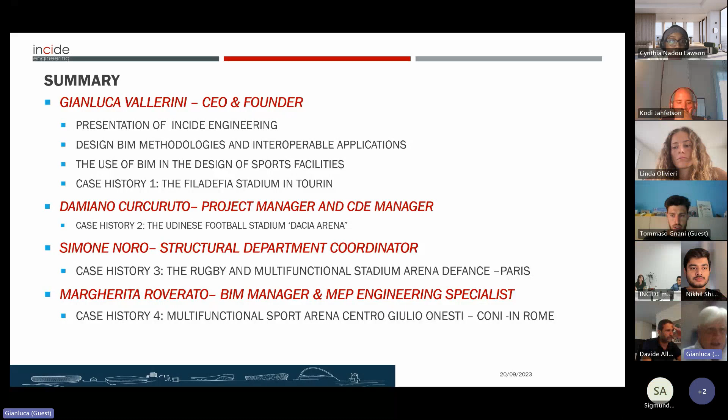So this is the summary of the presentation of today. As already told you, these are the people that you meet, and talking a little bit about me and about my company, just to let you know who Incide is and the experience that we have. Incide, or Inside, depending on the language, means industrial and civil design. This is the history. The company started 25 years ago, so we can say that we are a well-skilled, well-established design firm in Italy, but our company is not only in Italy.

Our experience goes through different countries in the world, and also we have some family companies in three countries. One company is in Switzerland, in Lugano. One company we have in Paris, another company we have in Morocco, in the capital, Rabat. Incide is a multifunctional, multidisciplinary engineering firm. So inside our company, there is all the experience that permits us to develop the design. So going from architecture to structural design to MEP, we can develop a project totally inside.

Also, it happens sometimes that we collaborate with other firms, architectural firms, structural firms, it depends on the size of the project. Sometimes we develop the project totally internally, sometimes we collaborate with other companies, especially when we are talking about a big project. And as I told you before, we have a good relationship also with American firms. We are working with a couple of Chicago design firms, but not only. And our experience goes from the Middle East to Europe to Africa.

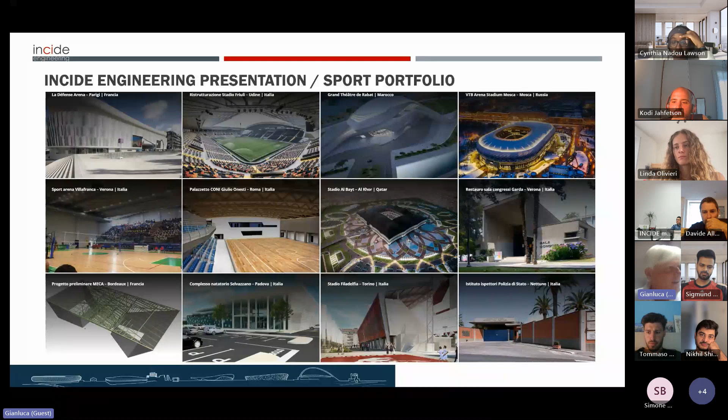You can answer. Please interrupt. I can't answer. Sorry? Do you understand the question? Yeah. Yes, I do understand. So

Is there anyone who would like to tell me if they know what BIM means and what BIM technology is used for in design, just to understand if what I'm illustrating to you is something you know or not? I've heard about BIM, just basic, but not in depth. Okay. So, good.

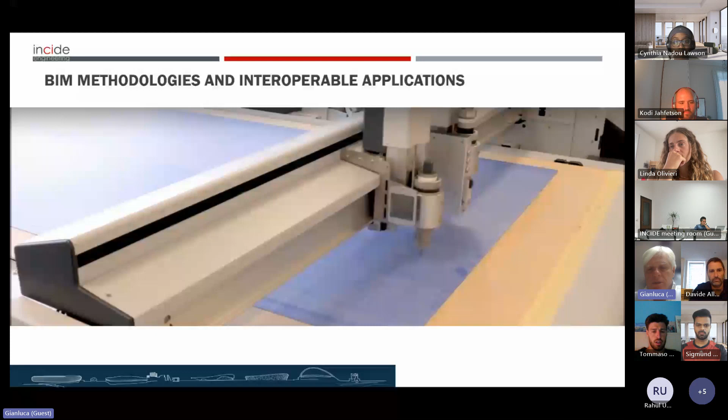Now, going to the future and looking at what the design office is now. Now the design office is completely different from the picture that we saw before. Now we are looking to the new technologies. All the new technologies are entering our way of working, and in our office we are also looking at what the future could be. Now all the world is talking about artificial intelligence, and for sure it will be necessary to have the competence to use these technologies. Otherwise we'll be out of the path of the future, and this has to be done step by step.

BIM, what does it mean? Wikipedia states that BIM, building information modeling, is a process involving the generation and management of digital representations of physical and functional characteristics of places. Building information models are files, often but not always in proprietary formats and containing proprietary data, which can be exchanged or networked to support decision making about the place.

What does it mean? Now we are no longer using paper to develop our projects. We are creating digital twins. Digital twins, what does it mean? They are 3D representations of reality, but this 3D representation is not only a geometrical appearance; mainly it is data included in our model, and from this data we can obtain many things, not only drawings, but as we will see later, we can use this model in different ways and different parts of our process.

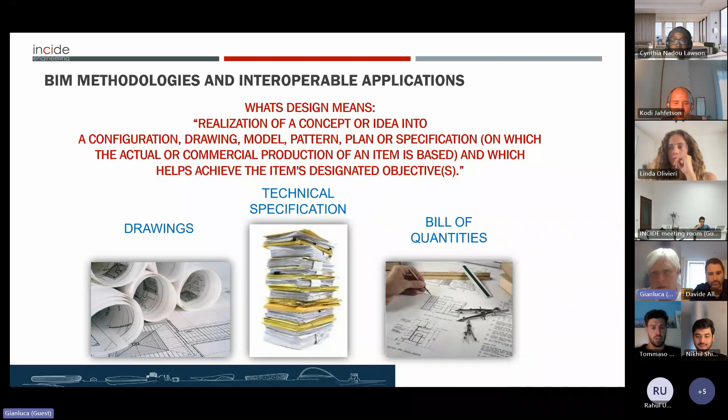This tower was built at the beginning of the century and is a very complex project. Anyway, it was built very quickly and the design is very complicated, without any new technology. So what does this say? That in any case, what is very important is also the engineering experience and the human capability. And now we have a lot of tools that permit us to facilitate our design, to construct our project very quickly and in a very safe way.

But in any case, human capability, human knowledge, is something that I think remains the most important thing for the future. Artificial intelligence is coming, but I would like, and I hope, that it will not replace our intelligence.

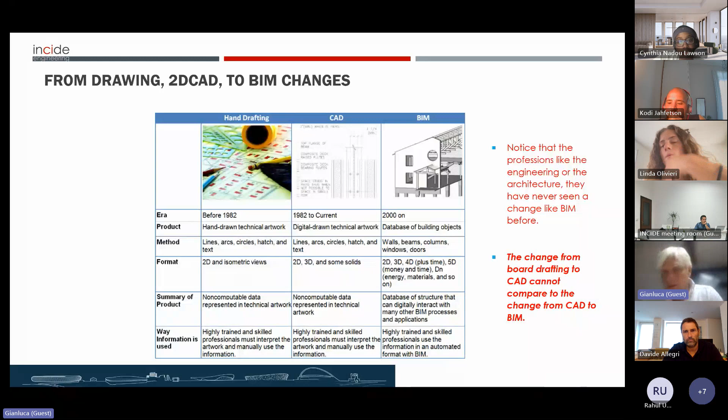And what is very important is that these objects are not only geometrical objects, but inside these objects a lot of information can be added. The software and tools we are using permit us to introduce into the object physical properties, material properties, all the information needed for other analyses. The model can be exchanged from an architectural model to a structural model, from an architectural model to energy analysis. So this is a way to put inside the object all the information that can be used, also in terms of cost of materials.

So the BIM model can now be used for all aspects of the design. All the design phases can be developed using BIM models: from 2D drawings, as I told you, to different types of analysis, and also bills of quantities, meaning how many kilos of steel or how many cubic meters of material. But in the end, all this information can also be used for the future, for building management, producing fabrication details, and the model can also be used for project management. So different parts of the design and of the construction process can be managed using our model, and this is what we are looking for in the future.

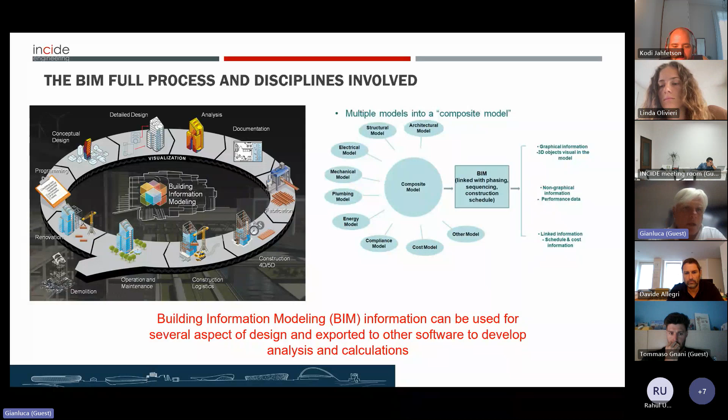At Incide, we have been using BIM for more than 15 years, and all our designs have been developed using this technology. The limitation we have now is that after the design, on the construction site, there are still few companies using this model to manage the construction process. So this is the future, and for sure we will arrive at such a situation, where the whole construction process can be managed using BIM: design, construction, and also building management.

In BIM, several dimensions are used. 1D and 2D are the traditional CAD dimensions. BIM technology uses four other dimensions. 3D is the 3D representation. 4D is the dimension of time, so we can introduce elements that help us produce the time schedule of the construction. 5D is the dimension of cost. 6D is the dimension of performance. So with all these four dimensions, we can manage the whole process and add all the information of the design process.

What are the other big advantages of using this type of tool? Perfect coordination of drawings, perfect coordination of design. All aspects of the design are included in the model. So from the very beginning of the design phases, we can check and manage the coordination between architectural, structural, and MEP. This is completely different from the past, when each discipline worked separately.

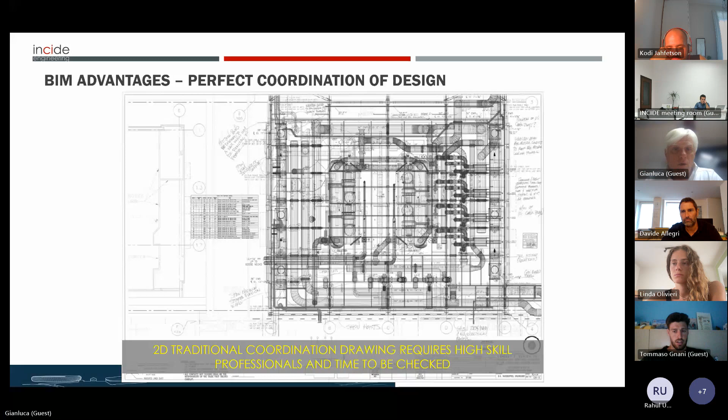Now, using BIM, different people and different disciplines can share the model using the cloud. That is a normal tool that we are using now. We can also work in different places around the world, coordinate and work together, having this type of coordination in the early moment of the design. And this is a very nice help for our job. So at the end of the project, the design will be perfectly coordinated.

Okay, it's well coordinated. In any case, human error never disappears. But we can anticipate a lot of the problems that normally arrive during the construction phase. And during the construction phase, an error coming from the design costs much more than solving the coordination problem during the design phase. So it is a very big help.

So the benefits of using this type of process are saving time, finding mistakes, and managing interference during the design phase, so not having big problems during construction, and also reducing cost, so cost optimization. With our experience using these tools, we can say that we have effectively had these benefits during these 10 years of using this process. But as I told you before, for me it's very important that human ideas and human experience remain a central part of our activities.

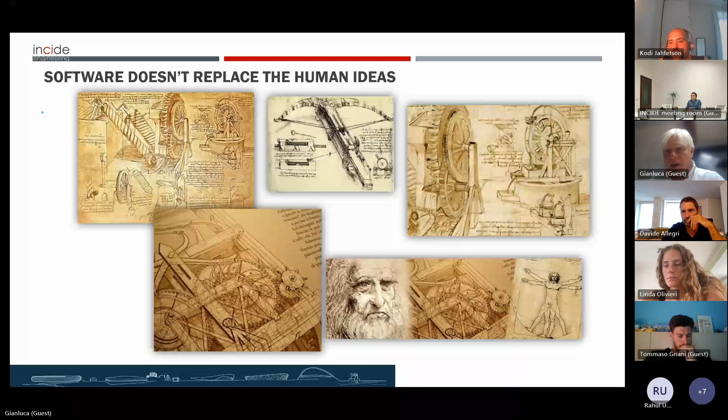Another important part of the development of our technology now is the possibility to exchange the data coming from a 3D model, from BIM, with different software for different parts of the project. This is called interoperability, and it allows us to use different software for different types of analysis. Here is a little video.

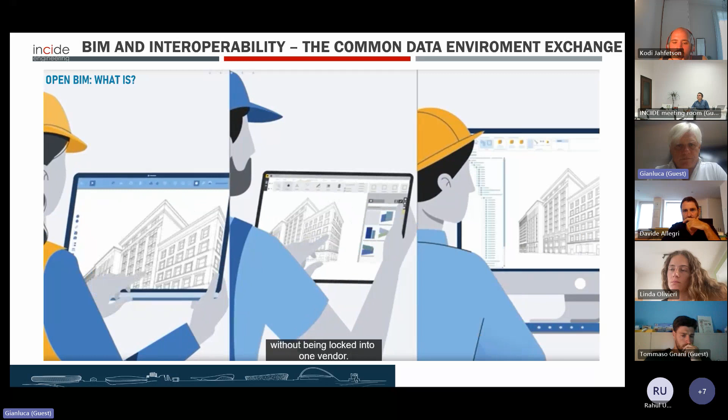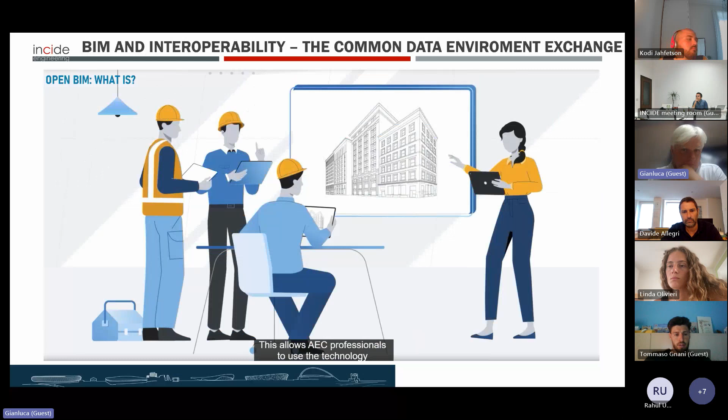What do we mean when we talk about Open BIM? Well, Open BIM is a format of building information modeling that uses open standards, providing several key benefits. First, every project member is able to use the best tools for their particular workflow without being locked into one vendor. Second, any stakeholder can access the BIM model without interfering with the native design. Third, all the disparate systems being used on a BIM project can communicate with each other. At the heart of Open BIM is a standardized communication protocol based on Industry Foundation Classes, or IFC. With this open framework, data travels easily between technologies. This allows AEC professionals to use the technology of their choice without the limitations of proprietary data. This leads to benefits that improve cost control, productivity, as well as reducing waste as the project has more efficient handoffs and fewer communication errors or data gaps.

For more construction content you might dig, subscribe to Constructible.

Okay, this video is a summary of what I said before. Now it is possible to exchange the BIM model using a common format called IFC. We can export an IFC model from one software, and this IFC model contains all the information we introduced in our model. For example, in our design we normally use the architectural model as a big box in which we introduce information not only for the architectural design, but also cost information and material properties.

So by exchanging this IFC model, we can use it with other software for structural design, for example, or energy analysis. This is a process that every company is creating according to their technology, and by making this process more stable it's possible to connect this information more easily and have a very quick design flow. So this is also something we are working on.

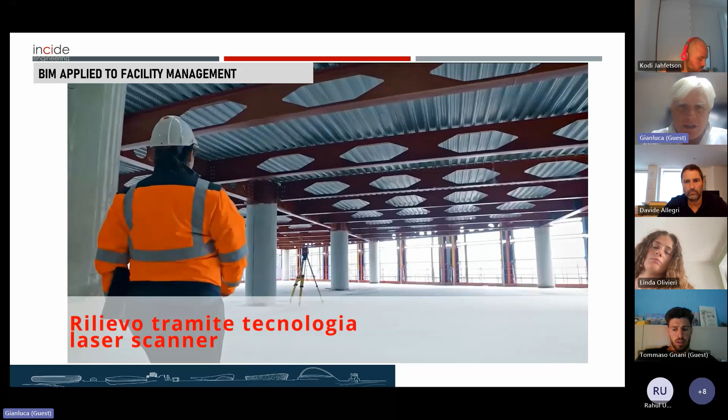Next one. And the future of using this type of software and tools is to use them for the entire design process. This is not a sports facility; it's a tower designed by our office in Milan. This experience started from an existing building, for which we developed the survey.

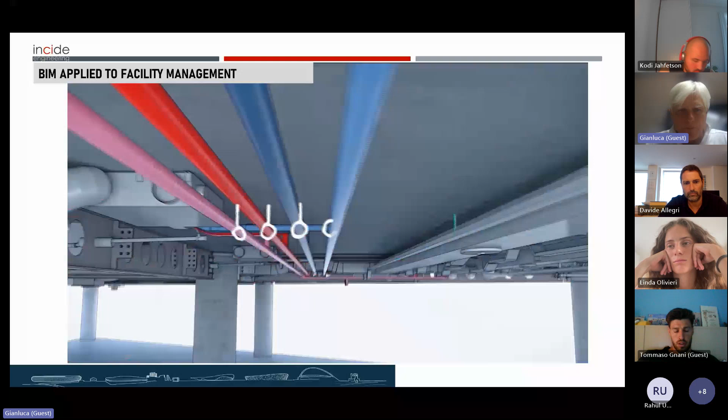The survey has not been developed using manual tools, but using a laser scanner. After the laser scanner, we transformed the laser scanner result into a BIM model. And after, we started the design, so inside the model all the elements of the design have been introduced, MEP especially, that has a big impact on the design. So all these elements have been introduced properly and without creating any problem during the construction.

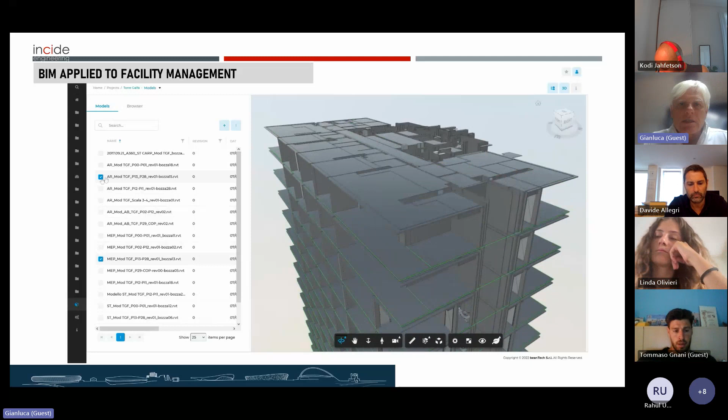Also during the construction works, the model is being used in order to check the design, to check the interference. But now we are using this model as a digital twin for facility management. So the model represents the reality. This model has been given to the owner of the building, and inside the objects there is information related to the management.

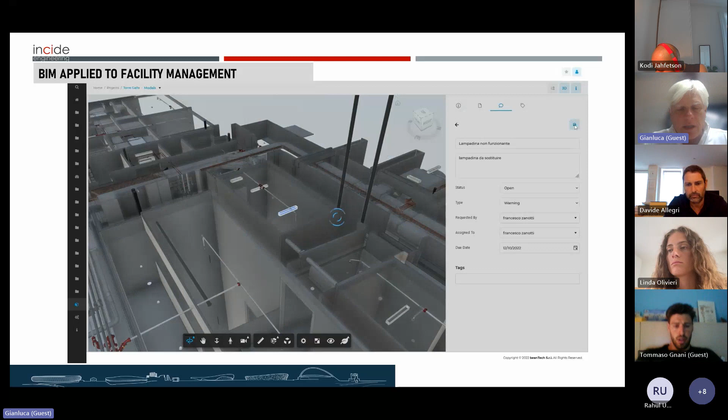So there is information about the data sheet of the material. So during the management, the person can have information about the material that is already installed, can have information about the time in which they have to check this element. And using this tool, this type of activity became easier, more friendly, and using also, what's the name? Business intelligence tools.

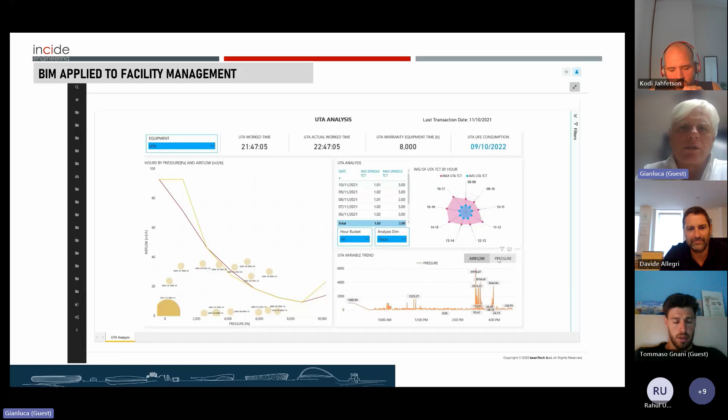We can have a report of all these maintenance activities, and also using sensors on the equipment, we can have information about the consumption that the machines have in the building. So also the energy consumption of the building can be checked and properly maintained, with monitoring during the life of the building. So this is one of the most important results of the technology that can be applied to the use of BIM.

So starting from the design, this model can be used for the whole process, arriving at facility management. And this is not only a vision, now it is something that is already a reality, and we are using these tools in our process.

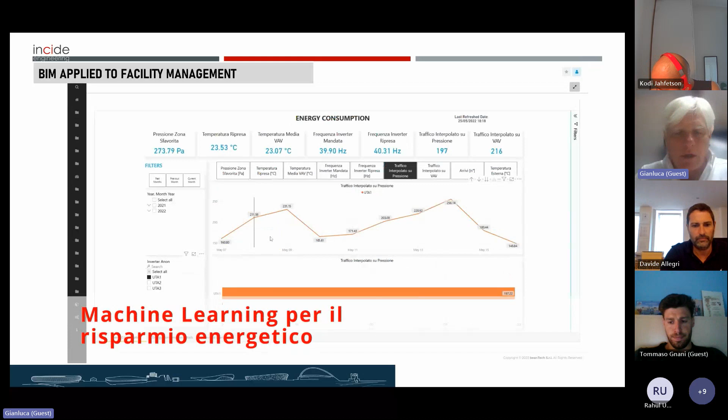Now I would like to tell you about the first case history. This is an experience that we have of a soccer facility in Torino, in Italy. This was a project of the renovation of a historical stadium. This was the initial stadium of the Torino soccer team. During its history, the stadium was abandoned.

There was a tender from the Turin soccer team in order to rebuild the stadium with the idea to recover the initial view of the stadium. So this was the main goal of the project. As I told you, this project was also developed using BIM technology. So a full model has been developed, including all the aspects from architectural to structural to MEP.

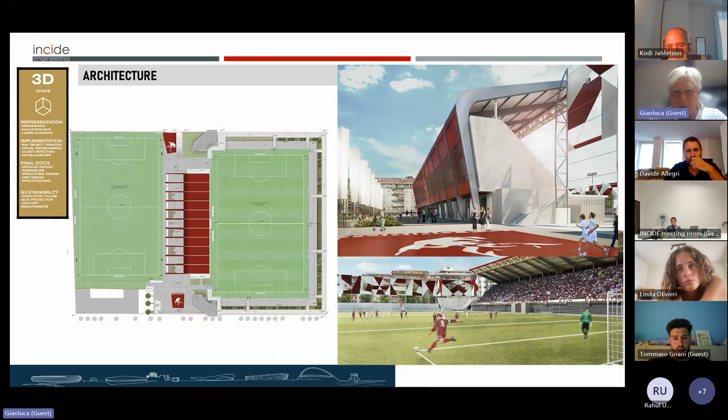And from this BIM model, all the analyses have been developed. So energy analysis, structural design of the steel structure and the concrete structure, and also MEP calculation, electrical design. This is the architectural. Architectural normally means plans, but also 3D representation and renderings. We had very good views, and that was appreciated by the client,

and also perspectives and elevated views of the project, but at the same time sections and views. So all these representations came directly from the BIM model. We developed the model, and from the model we can have all these representations. And also we can have representations of details.

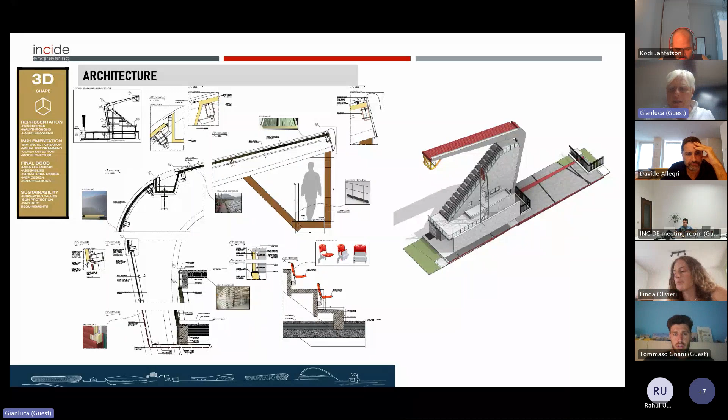The details are very important because our design normally goes to final design, meaning that we are giving the client proper information on how the construction has to be built. So it is not only general information, but detailed information. You can see that detailed representation of the construction is also included in the project. And details means not only geometrical representation, but also information on the materials.

From the BIM model, using databases and standards, we can have information on all the elements that are included. And from this information that is part of our design, we can also have information about the quantities. So everything is included in the model.

In the past, we developed 2D drawings, and the information about materials, the quantities and their properties was part of another section of the design. Now, using this type of approach to the design, everything is included and everything is well coordinated. But at the same time,

Sorry, Gianluca, just a curiosity for me.

I think you should make a specific library for the stadium, for a sport architecture. Is your own library built specifically from your office, or is it a library that you can buy somewhere?

This is a very interesting question, because we were discussing this issue a few days ago with colleagues. What is strange, especially in Italy, not in the rest of the world, is that any design office is developing by themselves their own library and organization of their project.

At the end, the result of our design - there is a video showing this. This is the BIM model, the complete model developed for the project, which contains all the information that allows us to present the project.

We are not yet at the phase where we can deliver just the model to the project. Probably this will be the future of our job. Now we are delivering drawings, technical specifications, bill of quantities, and at the same time, for certain big projects, we are also delivering the BIM model to the client.

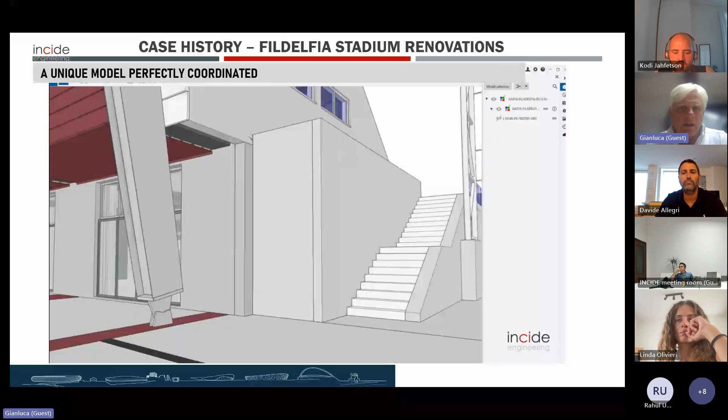The client is not yet fully aware of what he has to do with this model, but this is the rule we have in Italy now - for projects over 10 million euros, we are obliged to submit the BIM model to the client as well. So this model has been developed and perfectly coordinated. Everything is included.

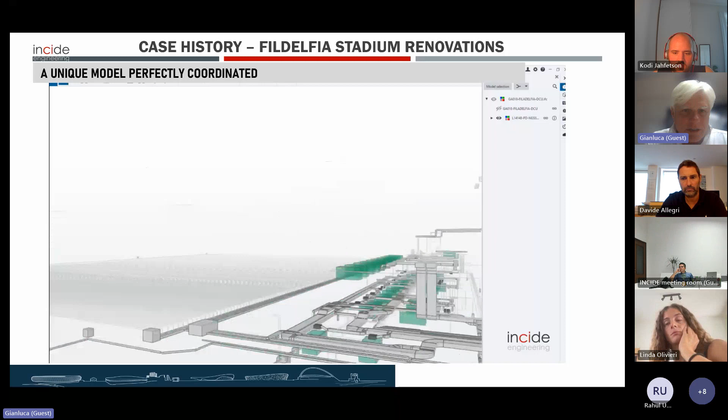You can see also there is for this soccer field the heating of the field, in order to avoid ice during the winter season. It's a little facility because there is not big tubing, since this facility is used only for training, for the main team and for the junior teams to play.

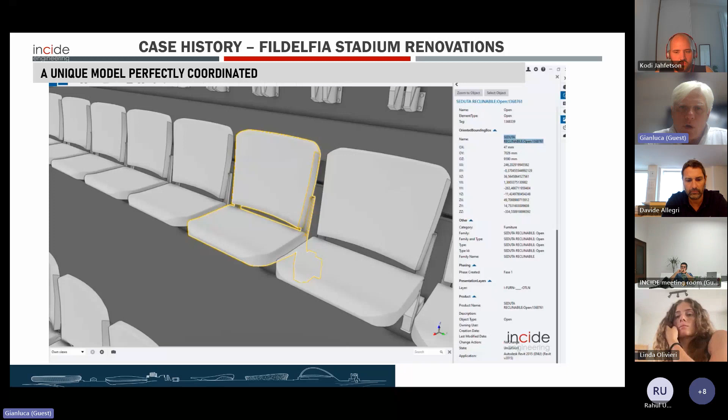So the tribune is not a big tribune. If I remember well, it's about 2,000 seats, the total capacity of the tribune. But you can see that you can have information. This is the IFC model, not the original format. So also in the IFC model, this is a viewer you can have from different software houses. You can have information about any object included in the models, not only in the proper software tools, but also in the IFC visualization.

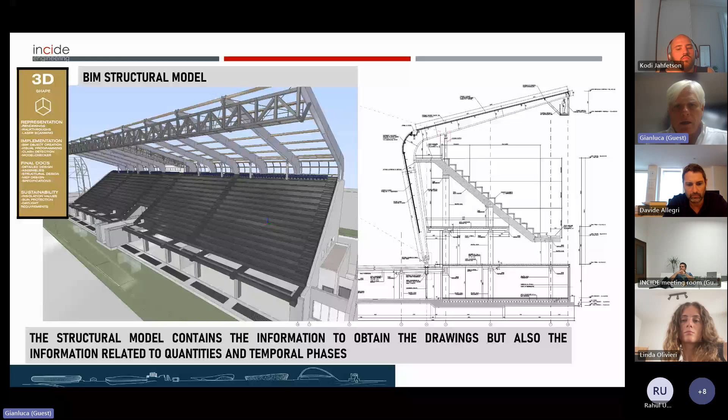And what else? Okay, we can go ahead. So we have a structural design, we developed also the structural design. This was a concrete tribune with steel roofing. So we developed some models and also drawings at the end in order to build the structures.

So, having the possibility to introduce this element in the model from the very beginning, the very initial stage of the project, reduces a lot of problems in a further stage of the project, because most of the time the space for the mechanical electrical system is not taken properly into account in the design. So we are well coordinating the design using this type of tools.

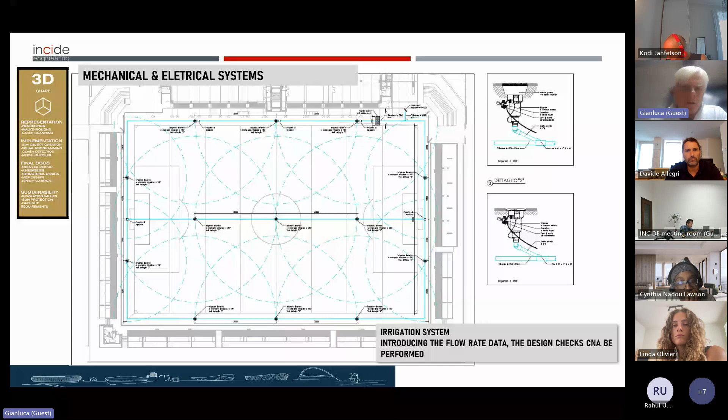Talking about software, we are using Rhino together with Grasshopper, and using these tools we can change input data. We can change the radius of the circle, we can change the spacing of the grid, and all these changes are managed very easily using this type of tools. This is the future of design, especially because now architectural shapes are very complex, and it's not possible to manage them in any other way.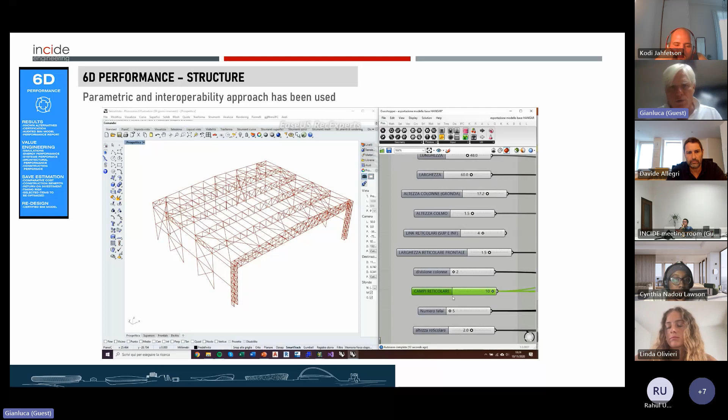This has been done using also the relationship that we have with the university, especially the university in Padua. We are in Padua, a historical city close to Venice, and we have a very good university, the second oldest university in Italy. We are hosting master thesis students who develop their thesis, and having this person in our office, we can also look into new technology and new approaches to design. This is very important for us.

For example, now we can use software that allows us to look to the best solution in terms of weight of the truss, changing automatically the shape of the truss or the arrangement of the beams in the truss. So the software, introducing some rules, is looking for the most efficient solution, and we do this automatically. Yes, this is something very, very interesting.

And from this analysis, we are having drawings, 3D models. So in the models, we have reinforcement, all the information that before had been developed using hand drawings.

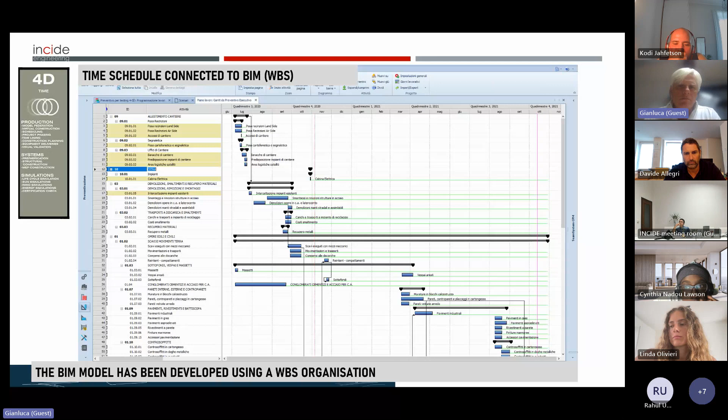Going to the 4th dimension of the drawings, using the BIM, we can connect the model with the time schedule. It means that our model has been divided into WBS, work breakdown structure, so the sequence of the construction, and the model has inside information related to the phase of construction.

So now we connect two different tools, the BIM model with the time schedule software, and we can manage this information in the same way, using the same 3D model at the same time. These construction phases are represented in 3D view, so we can see how the construction can be developed and has been planned during the design.

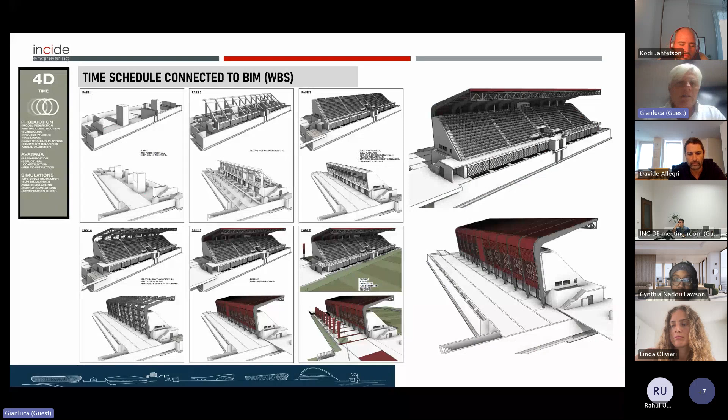At the same time, the connection between the BIM model and the bill of quantity is possible. There are proper software tools, but there are also some in-house tools that we have already developed, in which we can export the bill of quantity and quickly have the value of the construction cost. This is something that in the past had to be done using a person who counted the quantities on the drawing. Now there is a direct connection between the model and the bill of quantity.

You may already know this, but in order to underline this aspect, the value of the construction cost at the end is one of the most important things of our job. Developing a good project, a good design, doesn't mean there is only a good shape or a good architect, but the cost of construction has to be in compliance with the budget of the client. So this is our goal.

Having information about what the cost could be during the development of the design is a very important issue. Otherwise, this also happens in the past and sometimes to us, that you arrive at the end of the project and the value of your design is not compatible with the budget of the client. So a good design means a good architectural shape, a good structural solution, but also compliance with the client's cost budget. And using this tool, this result is much easier to reach than before.

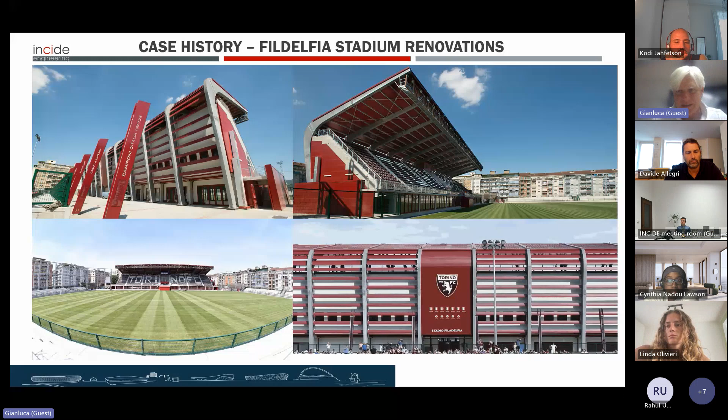The final result of this experience: these are not anymore drawings or 3D representations. Those are pictures of the stadium already built, and it's quite similar to the design, as you can see. Little changes in any case arrive at the end, so the final construction is never properly the same.

And as I told you before, we are also using business intelligence applications. Now the BIM model can be used to get information using also this type of application. So we can check different information levels. For example, here we can have information about floors, quantity of steel, concrete, but also about the time schedule. So now the BIM model is connected also to this type of software.

I don't know if you know, there are several; for example, Microsoft produces Power BI, and these are very nice tools to monitor your design. I don't remember very well what is the last.

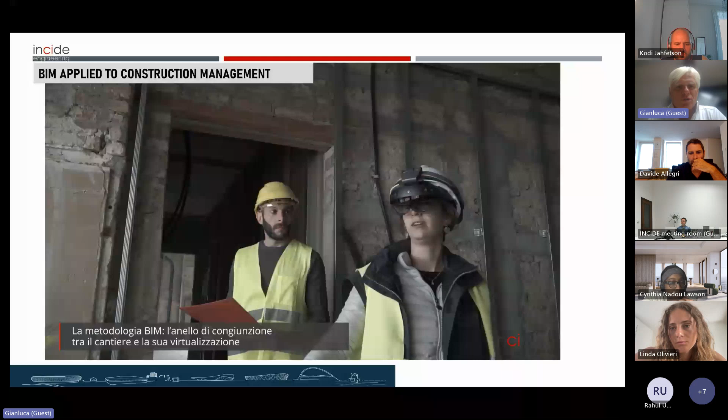Okay, this is another experience that is the future, and not only the future but the reality of the design. Probably the music is too loud.

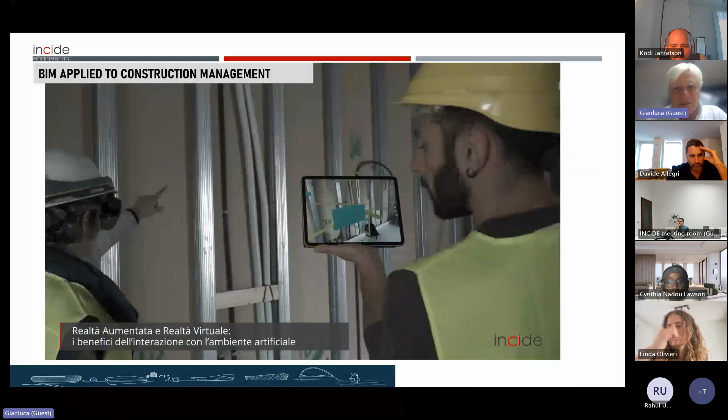Now it's also possible to use augmented reality, using a video screen that you can have in your helmet. You can go on site and have the visual representation of the design already during the construction phases. The one you saw in the picture is Margherita, who will talk to you later on, and this is an experience of renovation of a residential building, in which this approach has been applied not only to design, but using BIM during the construction phases.

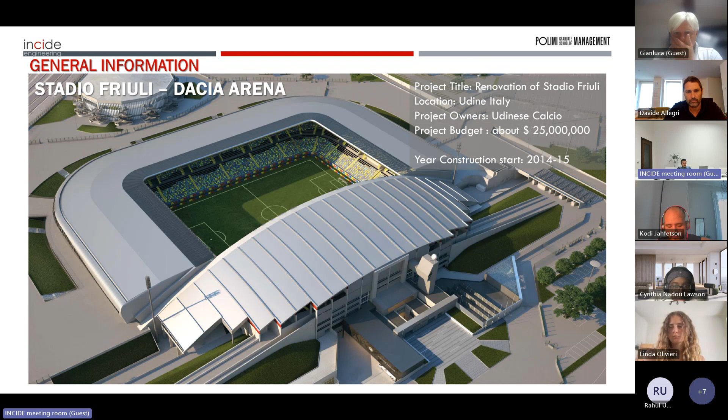So this is the picture of the detailed design from the architect. The football stadium is the stadium of the Udinese Calcio team, a Serie A team of the Italian Football League. And the actors in this project were main contractor ICICOP. The general design has been developed by Area Progetto Udine.

ICICOP in this case appointed the company Cimolai SPA for the construction of the steel structures. And our company has been appointed in order to develop the steel structure detailed design. Especially we approached the structural steel review and optimization, the detailed steel design, and the erection design.

Okay. The main purpose of this project of the new Friuli Stadium is to create a modern sport facility. I'm going too fast.

Okay. The modern sports facility is safe, sustainable, able to offer a unique experience for all the users, sports players, spectators, media, etc. And contextually continue to be a hallmark of the morphology and the architecture of the area.

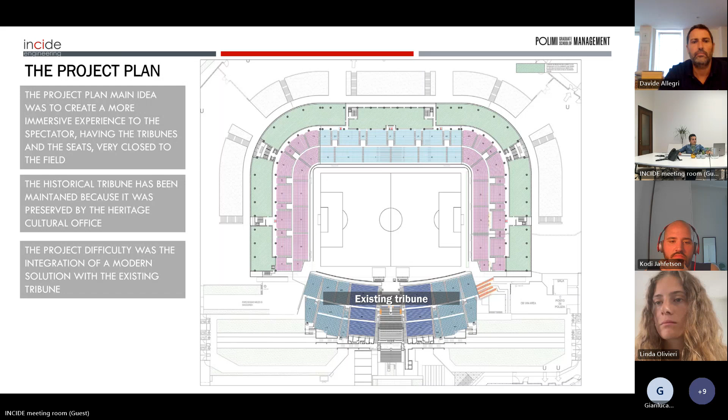Sorry, the keyboard goes too fast. Okay. Sorry, but I have some problem with the keyboard because probably the wireless is not connected. Sorry. Okay.

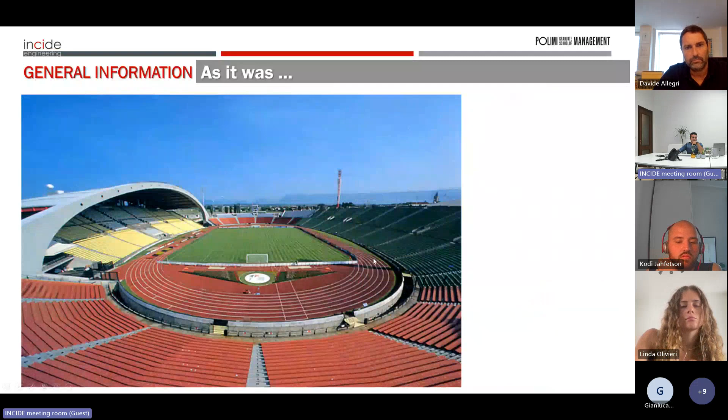This is the architectural plan of the new project that shows the new configuration of the stadium, with the difference between the two solutions, with the tribune now much closer to the soccer field than it was in the existing stadium. So here we can see the existing tribune that has been maintained, and the previous position of the existing tribune was outside the tribune that you can see. All the tribunes that I'm showing now with the cursor are the new tribunes moved towards the soccer field.

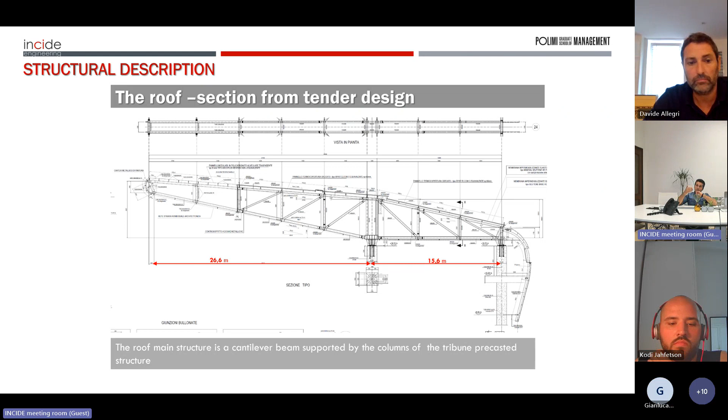Now, the roof main structure, as you can see, is a cantilever double truss beam supported by columns in precast concrete, spaced each 10 meters. So here you can see the plan. In the tender design, over each column spaced 10 meters, there was a double truss, and other 7 transversal trusses to provide the roof stability, completed by a system of cross bracing.

Working on behalf of the fabricator with their technical office, the Italian company Cimolai SPA, a new project has been developed in order to simplify the structural solution, with the aim to simplify the shop works, simplify the assembly work on site, reduce the construction timing, and simplify the installation on site.

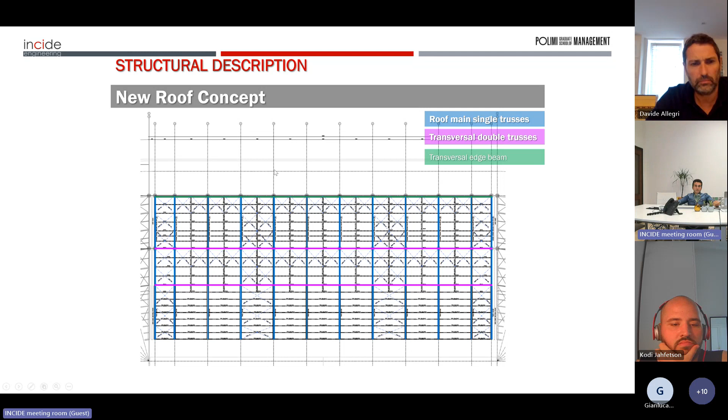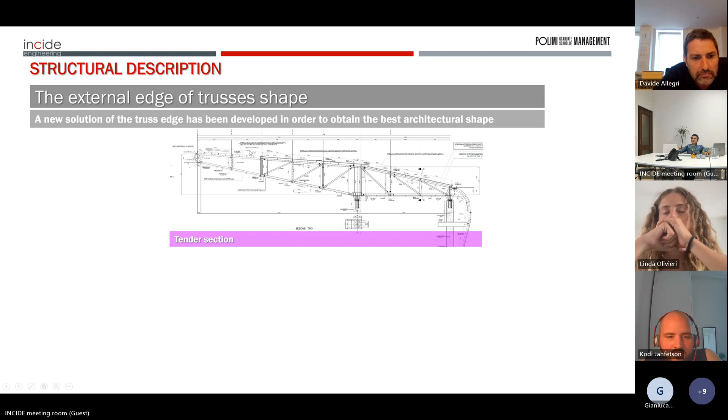Another important change from the tender design has been developed in the final edge of the truss, so these final parts. In order to obtain the best architectural view from the internal side of the stadium, instead of having the trusses with ceiling in the lower part, a single exposed beam has been used, and a polycarbonate roofing has been installed.

So here we have a comparison between the two architectural solutions. In the tender, there was a truss edge with a round shape covered by polycarbonate on the top and a wire mesh ceiling on the bottom. The new solution has an exposed white-colored beam with polycarbonate, giving more light to the soccer field.

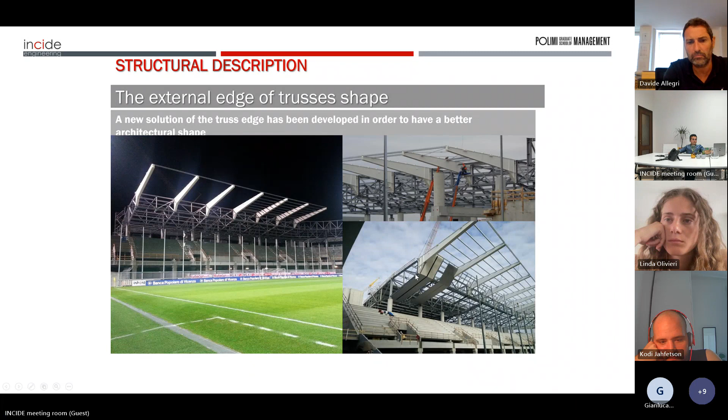A BIM structural model has been developed for design and in order to coordinate the architectural aspect and other disciplines. The detailed calculation has been performed to check the cantilever beam and its connection to the truss.

Okay. This is a detailed drawing of the cantilever beam obtained from the 3D model that I showed before, using the software Tekla Structures in this case. And from the BIM model, general drawings and detailed drawings can be obtained. This is how we did it.

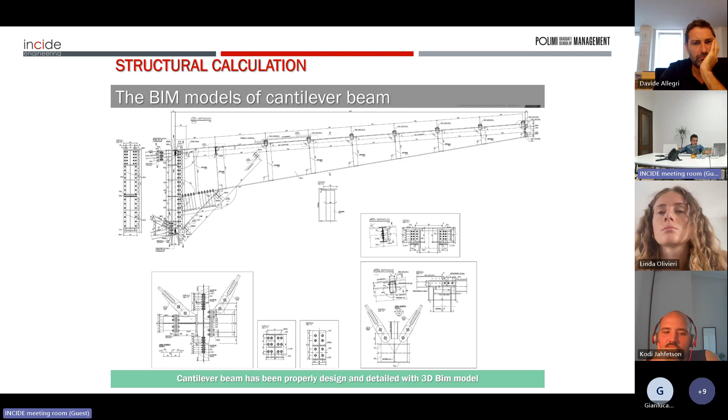The connection between the trusses was a very critical issue to manage, because we have a lot of items that have to be coordinated with the precast fabricator. And all the loads of the roof are transferred to the concrete structure by only these two elements.

The central element is composed of a cross section of welded plates. So this is another optimization that we did, in order to be able to join the members of the trusses easily and leave space for the anchor bolts. A FEM model of the members has been developed in order to check the stress and to evaluate the buckling coefficient.

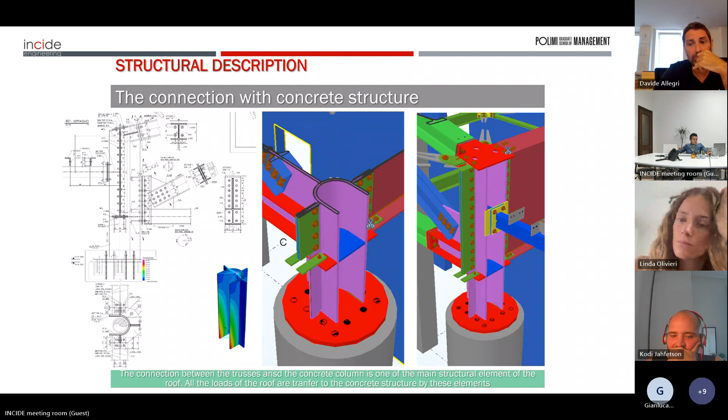A full FEM model of two sectors of the roof has been developed. Two models have been developed, one for the south and north tribunes, which are structurally the same, and one for the main, central tribune. This was necessary because the structures are separated by a seismic joint of more or less 10 centimeters.

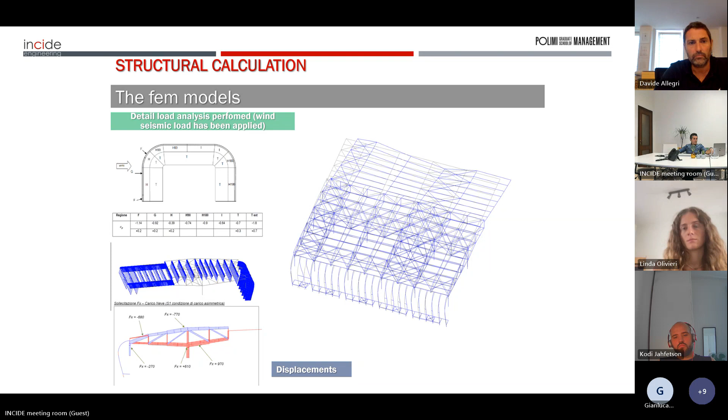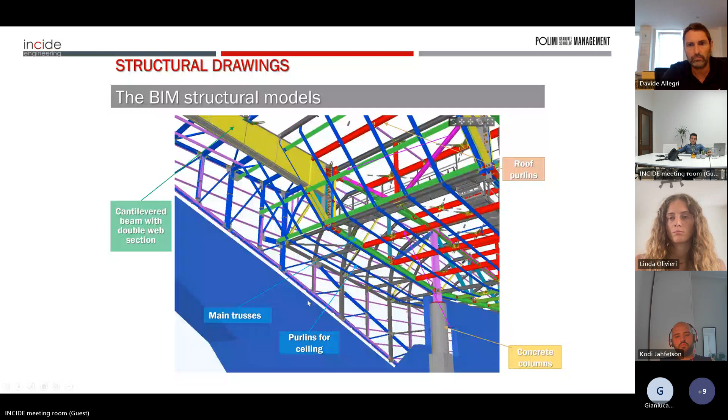This is a view from the lower part of the structure at the beginning of the installation of the ceiling. You can see that we follow the BIM; with the BIM we respect the reality. Here we can see a picture of the structure with the nearest picture extracted from the model. As you can see, the job was effectively done.

The structural element that connected the existing arch roof to the new roof was a particularly complicated element to define, because it had to satisfy the architect's requirements and solve all the coordination aspects. This was complicated, related to the complex shape of the external facade, developed in double curvatures in some parts, which needed a previous analysis of discretization.

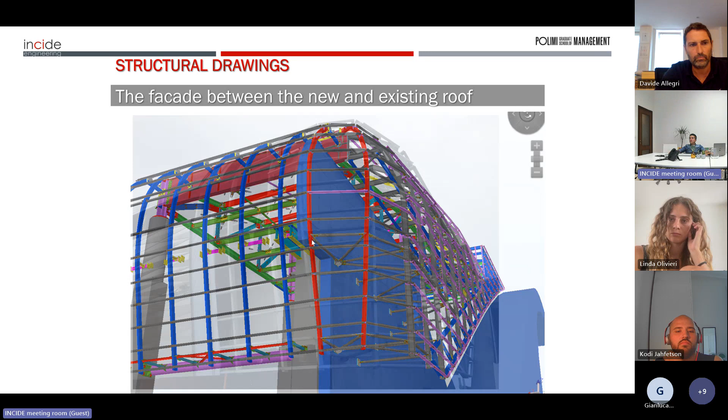In addition, it had to respect the facade joints, and all the alignment needed to maintain a fixed distance from the existing arch. This operation first needed to acquire the geometrical information, as told before, from the site of the existing construction, needed to implement the final geometry of the structures. Here we can see the final result before the facade installation.

Another aspect that we developed is the erection design. The erection design of the facade close to the existing concrete arch, and all of the installation of the steel structure, studying a simple optimized solution using a simple lifting crane positioned on the external side of the stadium without particular interferences with the soccer field.

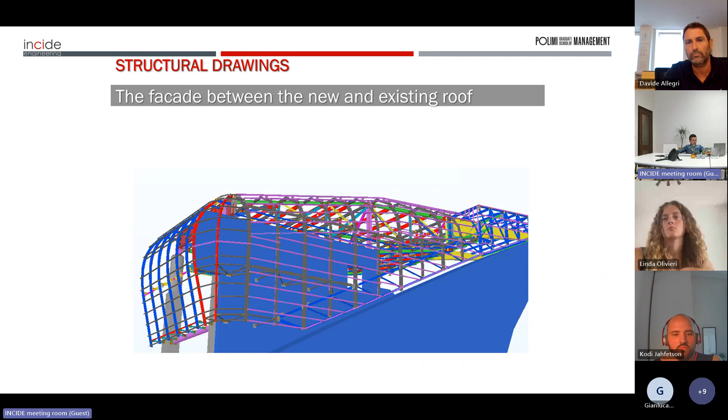At the end, the secondary structure of the facade has been realized as per facade geometry discretization, following all the restraints of the existing elements, the requirements of the existing, and the settings of the steel fabricator. Here we can see another picture that represents the final installation.

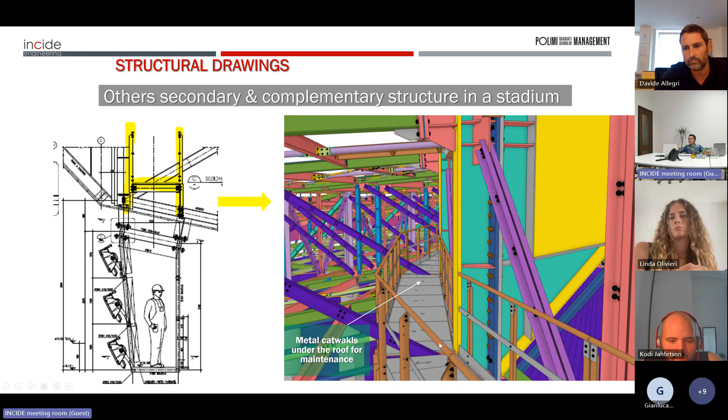Okay, other secondary and complementary structures in the stadium, for example, the supports for the lights, the metal catwalks under the roof, and the secondary structure for the maxi schermo. This is the metal catwalk that goes around under the polycarbonate roof. This is the maxi schermo that has been supported by steel structures connected to our main structures.

Okay, yes, another general information concerning this project is that the stadium is not only a stadium. Basically, the architectural design provides a modern solution related to the space destination in order to use the stadium capacity. The concept is to dedicate the indoor spaces under the tribunes, covered by roof and facade, to commercial spaces, bar, skybox, press area, meeting area, restaurant, and other public areas.

Erection design is another important part of the design because it needs to solve a lot of critical issues related to the context of the site. This part of the design has been developed in order to define the site organization, the assembly at ground of the elements, the erection procedures and tools needed, and the stability of the structure during the provisional phases.

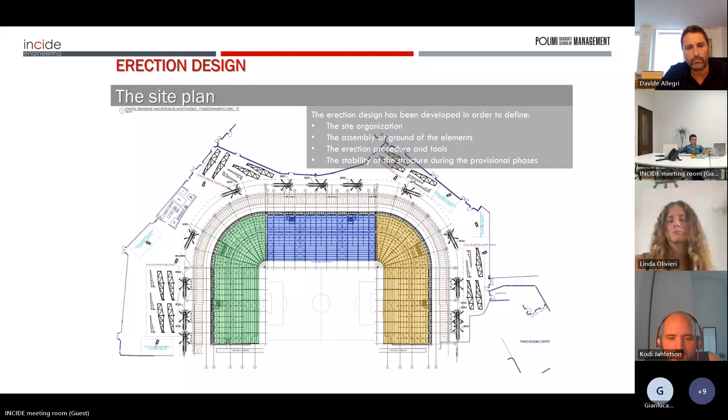Each erection phase has been properly studied and analyzed, taking into account the crane capacity and lifting tools required. In addition, the management of the data extracted from the BIM model gave advantages and benefits for this purpose. This is another sample of erection design and how the site strictly follows the project. We can see it in this picture.

Another very important aspect of this project is that the construction has been performed maintaining the availability of the stadium for the matches. So the capacity of the tribunes has obviously been reduced, with the existing arch tribune maintained operative. The main requirement is that it was not possible to affect the schedule of the championship. So it was a very strong challenge.

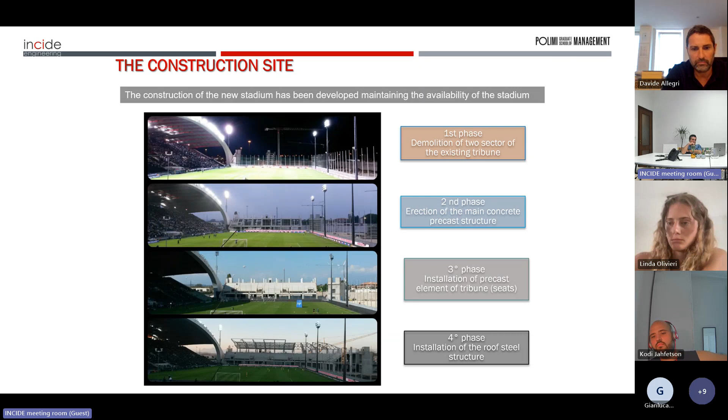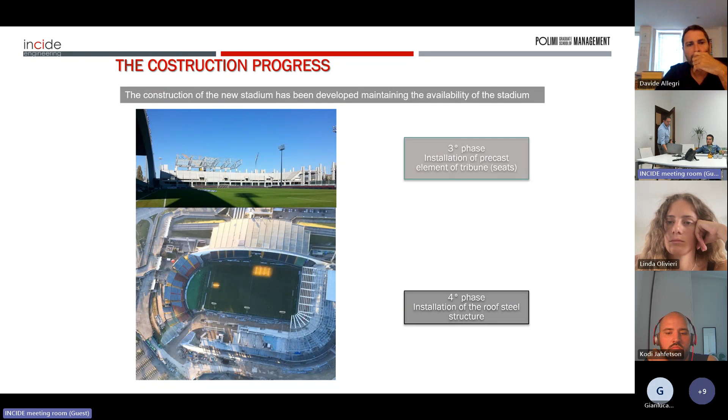From these aerial views, it's possible to understand better the construction sequence. Demolition of the north tribune and the erection of precast tribune structures and roof steel structures. Demolition of the main tribune plus erection of the precast tribune structure plus roof steel structures, and demolition of the south tribune with the same sequence. The works have been developed maintaining the availability of the stadium for the championship.

Here we can understand better the sequence. And you can see we tried to use all the available spaces outside the stadium for the crane. So all the football matches could go on, and the soccer field could be used.

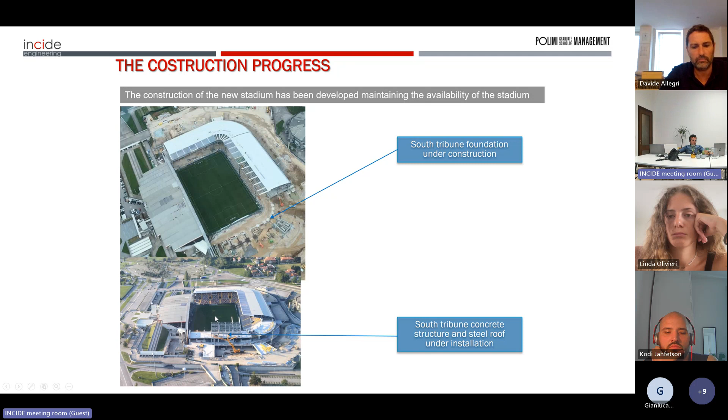Yeah, probably we have a video that is not working. Sorry.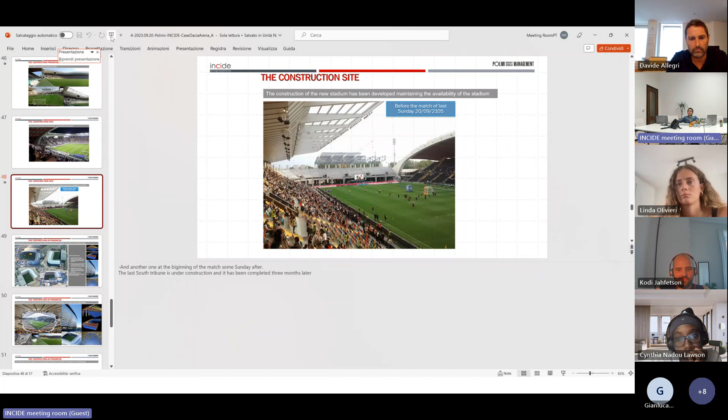And another one from the beginning of the match, on some Sunday: the last tribune is under construction, and it was completed three months later. So, summarizing, those are pictures from the aerial view which describe the progress of the work until the status of almost the completion of the latest tribune.

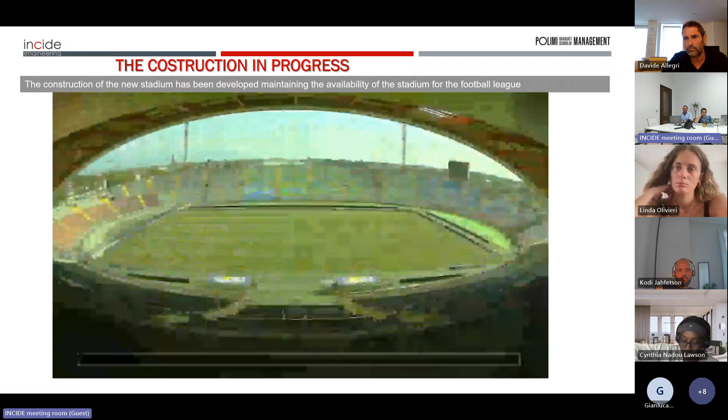This is a short video that can describe the erection sequence of the installation on site until completion. The continuous activity of the Football League is an aspect that generates a lot of critical issues for the installation phases on site, and for the construction company that had to arrange particular studies in order to perform the storage of elements and define the best installation sequence, always respecting the time schedule. So that has been the main restraint that we had.

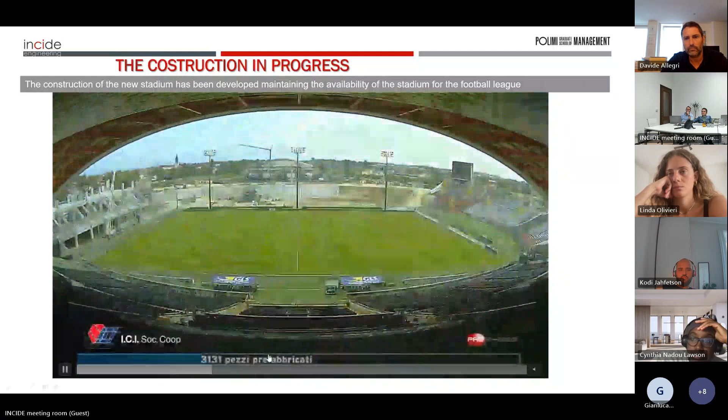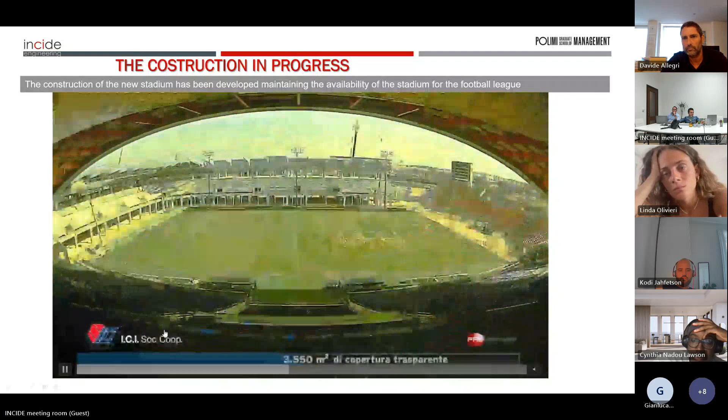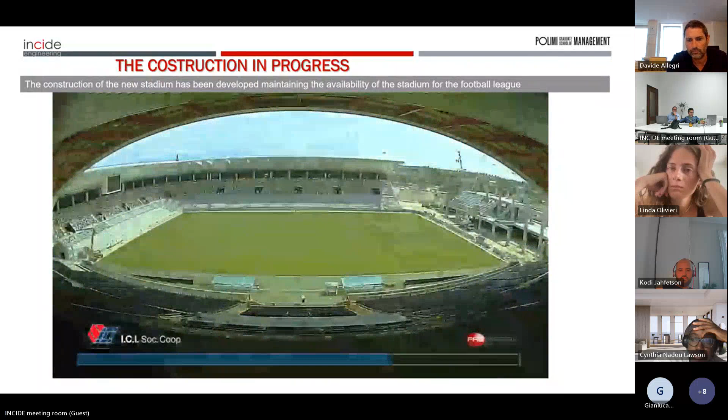The quality of the video is not the best, but I think that we can understand how the site has been implemented. You can see that two tribunes have been completed and the match is working.

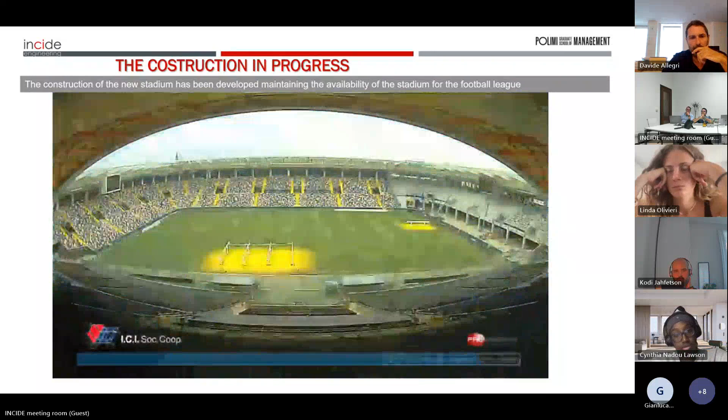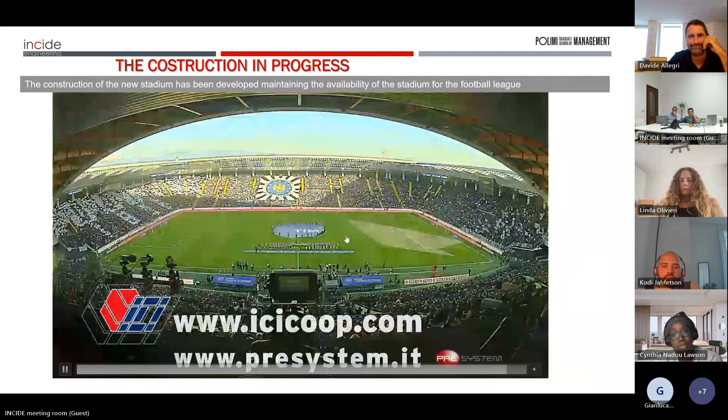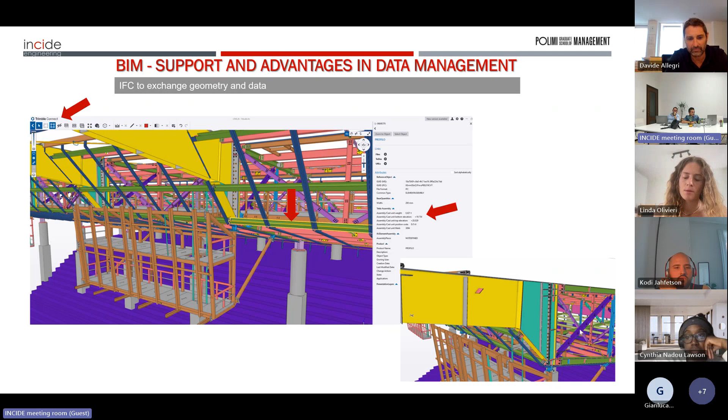The weight of the exchanged file must be light, because all the stakeholders need to use this file for coordination, and you can export in the IFC directly the parameters you desire. You can always have a view of all the data and all the information that the project has to follow. Here we can see the structures. Here we implement all the information that we need, that the fabricator needs, the precast fabricator needs, etc.

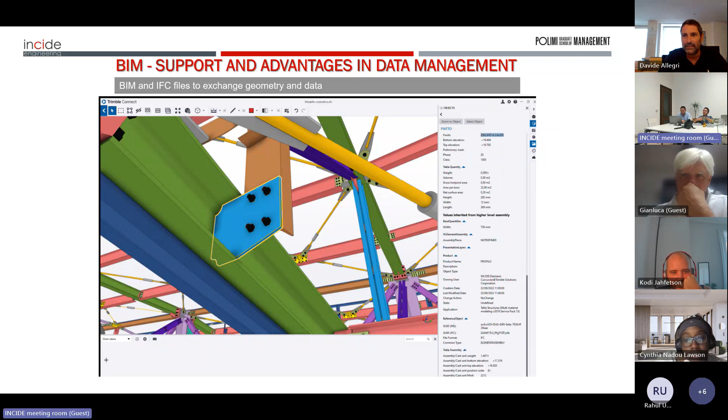So you can see the information in the lateral part when you click on any element. So IFC is not only a geometrical reference, but a full information reference. You can see material, type, geometry, and you can decide what you want to exchange with the other stakeholders that you have to coordinate on any aspect. Okay.

Concerning BIM, used in the right way it can perform the management of any type of data: as I told you before, quantities, deadlines, cost. Here are represented some pictures which describe a customized interface that graphically represents the total takeoff quantity of the steel structure managed. The quantity is maintained under control by our technical office for the steel fabricator, periodically exporting lists and reports directly from the BIM software, in this case Tekla, directly connected with the interface, with the main purpose to visualize and anticipate any issue.